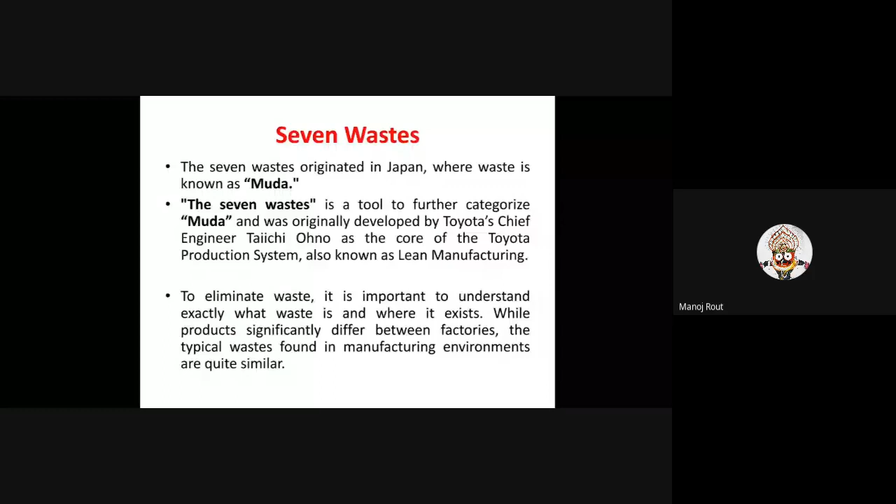As you know, today's topic is known as the 7 wastes. The 7 wastes originated during World War II in Japan, where a high level of specialization was involved. Waste is known as Muda in Japanese. The 7 wastes is a particular tool for categorizing Muda, originally developed by Toyota's chief engineer Taiichi Ohno, who was the core developer of the Toyota Production System. Ohno developed the concept of the 7 wastes, which is also known as lean manufacturing.

To eliminate waste, it is important to understand exactly what the waste is and where it exists. While products differ significantly between factories, the typical waste found in manufacturing environments is quite similar across any kind of manufacturing industry. Let's go to the next slide.

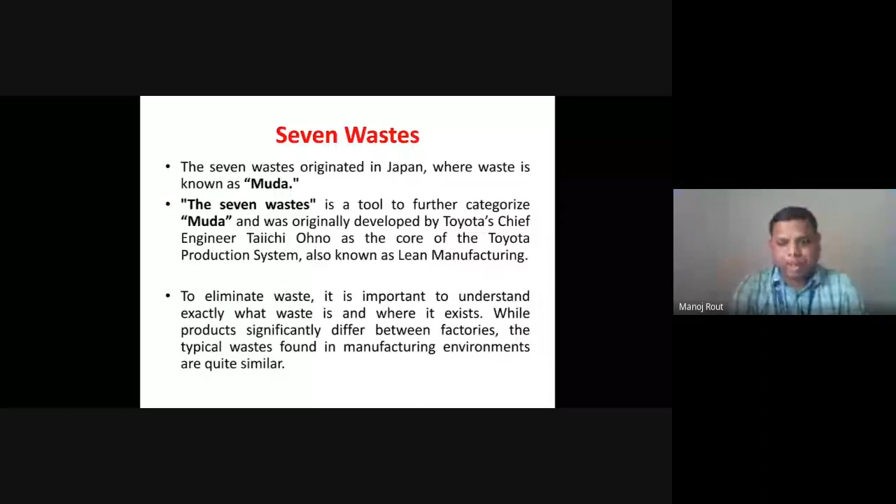The first one is overproduction: produce faster in higher quantity than the customer demand. Overproduction directly involves more value addition in case of storing and loading activities, and other related activities concerned with overproduction.

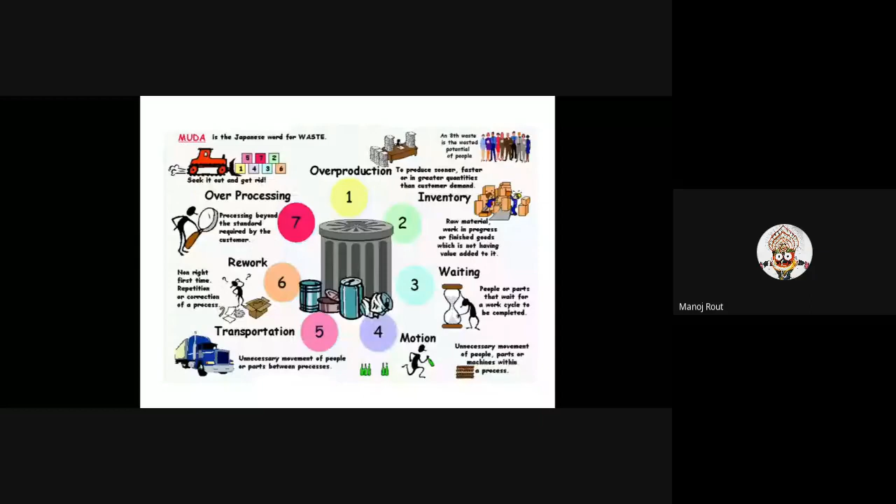The next one is inventory: the raw, work in progress, and finished goods which do not have value added by maintaining a higher amount of stock. That also needs some space, warehouse, storing and loading activities. The 7 waste methodology, introduced by Taiichi Ohno, suggests you have to maintain an adequate level of inventory.

The next is waiting: the people and parts that wait for a work cycle to be completed. We have to minimize the waiting cycle of parts and people directly involved across the number of workstations.

The next one is motion: unnecessary movement of people, parts, and machines within the process. Whenever a person is assigned to different process activities and moves from one place to another, that hampers production activities. When a person is not strictly involved in manufacturing activities, due to lack of involvement at workstations, they generate more wastage in terms of delay, machine setup, running the machine, and maintenance.

The next part is transportation: unnecessary movement of people or parts between processes. Whenever you do not employ automated guided vehicles or articulated robots for movement of people or material from one workstation to another, they directly generate wastage, and in some industries this generates a higher amount of wastage during transportation activities.

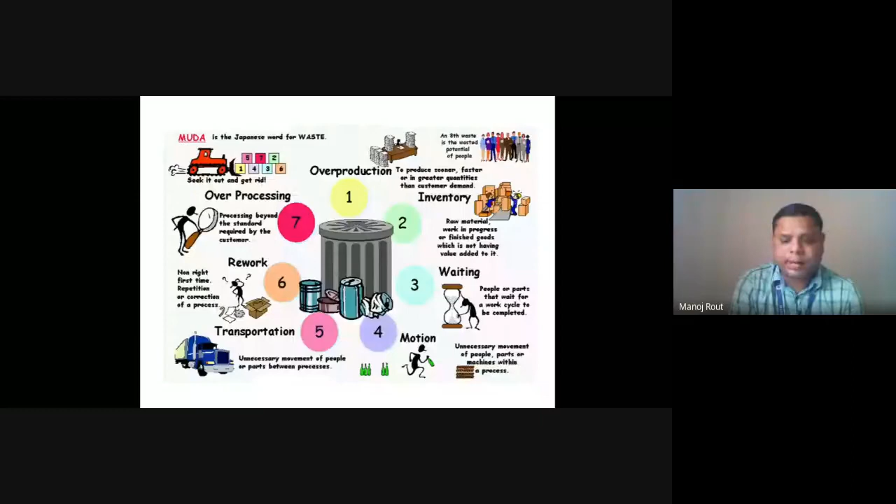So these are the things we discussed one by one in the previous slide. Let's go to the next slide. Okay, we have already discussed the first one is overproduction, waiting, then transportation, inappropriate processing, unnecessary inventory, unnecessary or excess motion, and the last one is defect. Going to the next slide.

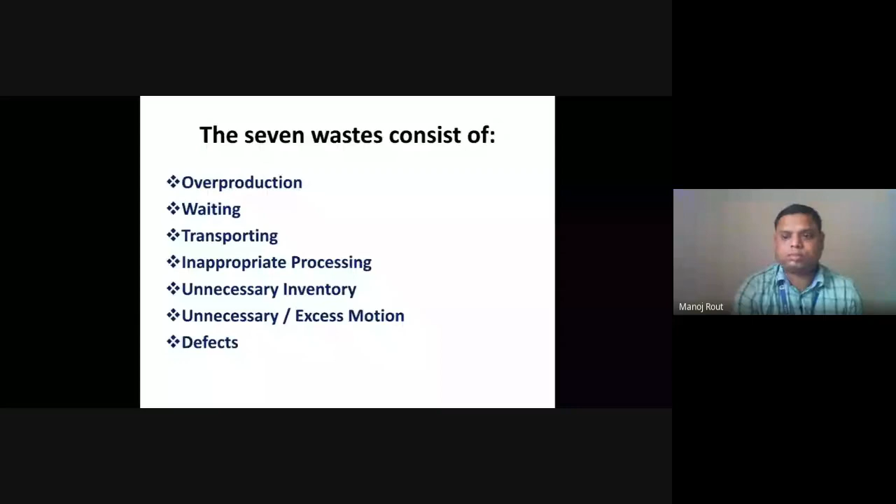In case of production, overproduction is very costly to a manufacturing plant because it prohibits smooth flow and actually degrades quality and productivity. The Toyota production system also refers to the just-in-time concept: every item is made just as it is needed. Overproduction refers to just-in-case, which creates excessive lead times, results in high storage cost, and makes it difficult to detect defects.

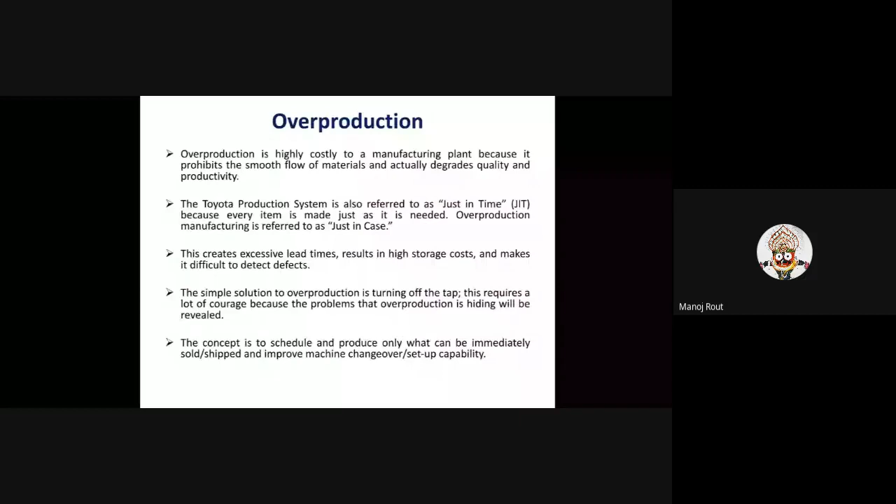The next point is that the simple solution to overproduction is turning off the tap. This requires a lot of courage because the problems that overproduction is hiding will be revealed. This concept is to schedule and produce only what you can immediately sell, to improve machine changeover/setup capability. Due to overproduction, you get high storage cost and more defects in product quality. So you have to go for a remedy like scheduling and producing only what is immediately needed and sold, and go for machine changeover if any difficulty occurs at the workflow level.

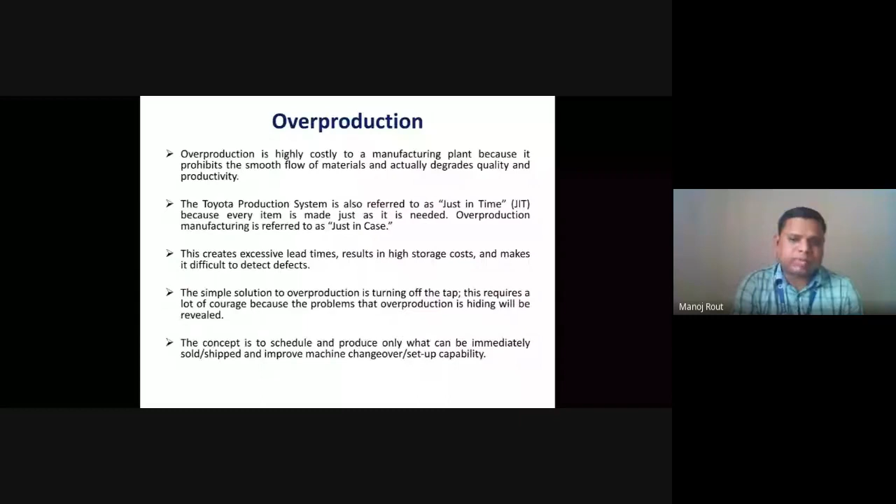You have to go for setting the capability of machines. Next one is waiting. As far as concerned with the time, whenever goods are moved or processed, the waste of waiting occurs. Typically, more than 99% of a product's life in a traditional batch will be spent waiting for the process. That is why if you go to the company, they made the arrangement of more number of buffers to reduce the time of waiting.

The next point is much of product lead time is tied up in waiting for the next operation. This is usually because the material flow is poor, production runs are too long, and distances between work centers are too great. So with proper arrangement of a layout, you have to place the workstations nearer to the next workstations in the sequence.

So due to that, you can minimize the material flow from one workstation to other workstations, minimize the distance, and also affect the lead time. So if you minimize the lead times, the workflow, and the distance between work centers, it directly affects your waiting.

The next is, as you know, the theory of constraints, a concept given by Eliyahu Goldratt. He stated that an hour lost at a bottleneck process is an hour lost to the entire factory output. So if you have arranged 4 to 5 workstations in a sequence, and machine number 2 faces any kind of difficulty, for example it is lost for 1 hour, that breakdown will affect the entire factory output.

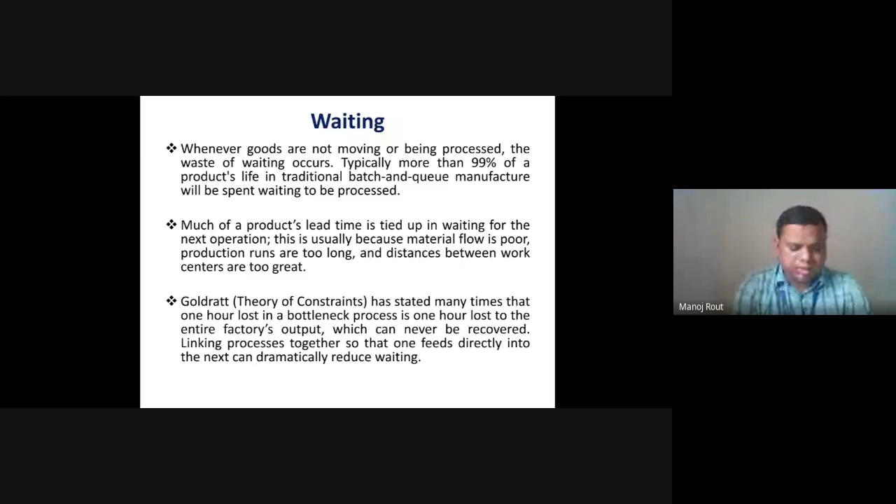Okay. He suggests that linking the workstations, or linking processes together so they can feed directly into the next, dramatically reduces the waiting time. So if you arrange 4 to 5 workstations and workstation number 5 gets any kind of maintenance difficulty, the whole team attends that difficulty in the form of maintenance and smooths the machining and the material flow, so that the product passes from one workstation to other workstation.

In that area, that is the concept they have given, the theory of constraints, and all the teams attach to it and make an effort to smooth that particular operation. Moving to the next slide.

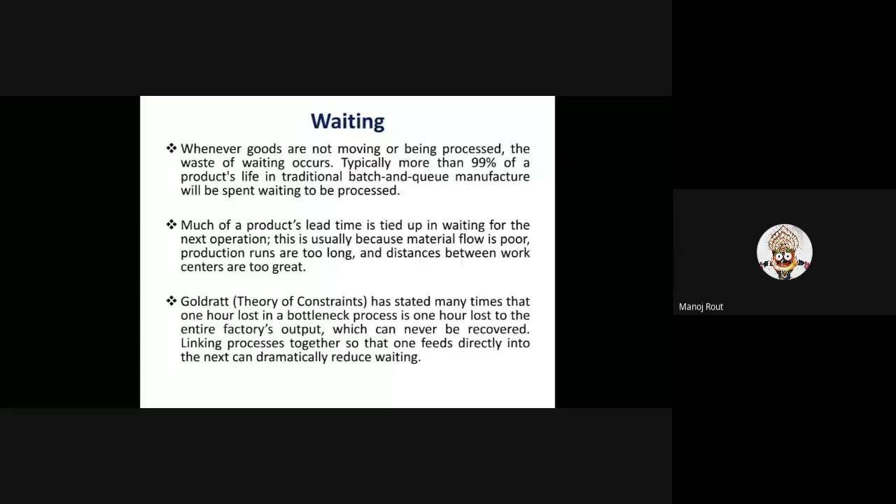The next is transport. Transporting product between processes is a cost that adds no value, with movement over long distances due to improper arrangement of the layout of machines. The material handling used to transport material results in another organizational cost that adds no value. So whenever you arrange an improper layout of machines, equipment, and tools, the movement is very much higher. No value should be added in case of transportation.

But transportation can be difficult to reduce due to the cost of moving processes close together. That is why for transportation they suggest you arrange the machines attached together in such a way that you can minimize the cost of transportation, or cost of moving components from one workstation to other workstation.

Further, it is often hard to determine which processes should be next to each other. Mapping product flow can make this easier to visualize. That is why it is advised for operational activities that they should implement the product flow map. By the help of a product flow map, they can easily visualize and track the activities of workstations, or even people directly involved in manufacturing activities. Moving to the next slide.

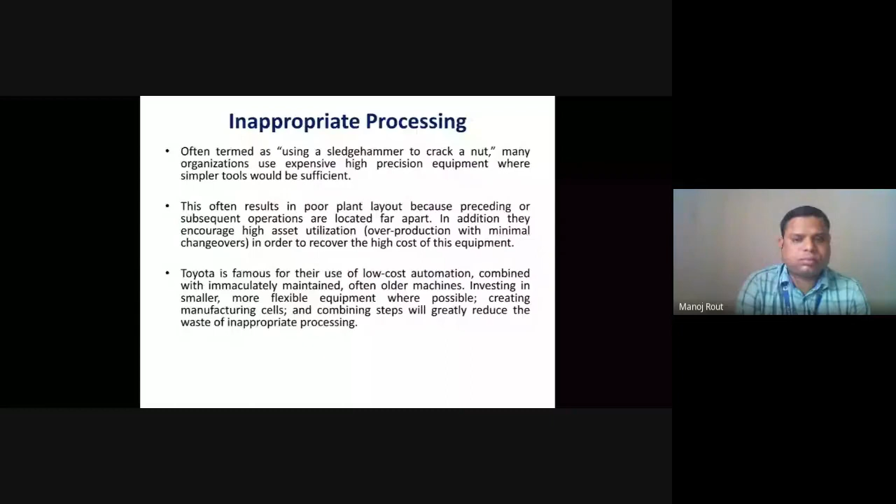The next is unnecessary inventory. Work in progress is a direct result of overproduction and waiting. The excess inventory tends to hide problems on the plant floor, which must be identified and resolved in order to improve operating performance. Excess inventory increases lead time, consumes productive floor space, delays identification of problems and inhibits communication. By achieving seamless flow between workstations, many manufacturers have been able to improve customer service, slash inventory, or optimize inventory levels and their associated cost.

So if you hold a huge amount of inventory, it directly goes to work in progress, and it directly hampers operating performance. It also affects different aspects of good manufacturing practice. For example, lead time, it also occupies floor space, delays identification of problems, and improper communication leads to unnecessary inventory levels.

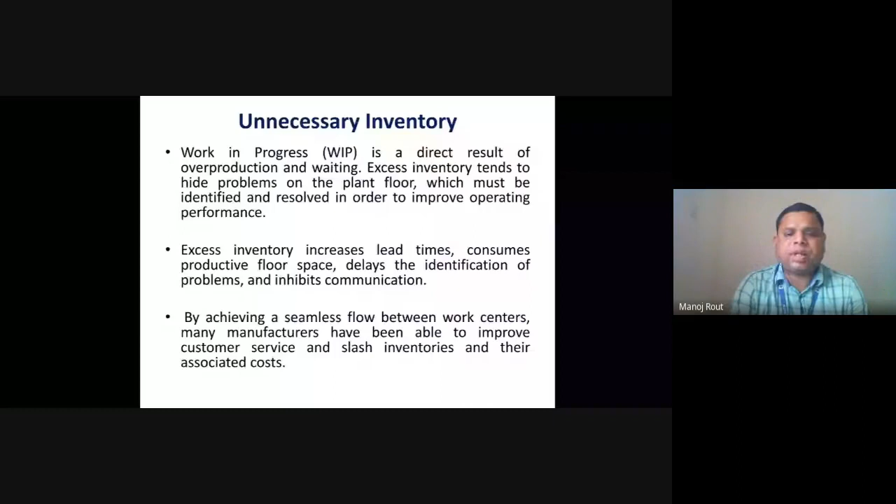So it is the advice through the 7 wastes implementation. By achieving seamless flow of work centers, many manufacturers are able to improve customer service, because from the company point of view, they optimize the inventory level and the costs directly associated with the inventory level.

The next one is unnecessary or excess motion. This waste is related to ergonomics, that is the study of people's efficiency in their working environment. It is stretching, walking, lifting, and these things. That is why motion study should be thoroughly implemented to track and visualize control of those people who are directly involved in a number of workstations.

There are also health and safety concerns, which in today's litigious society are becoming more of a problem for the organization. So jobs with excessive motion should be analyzed and redesigned for improvement with the involvement of plant personnel. And it is the duty of the HR department. They provide adequate training regarding OHSAS 18001, which is directly related to health and safety, an international standard implemented for the occupational health and safety of people directly involved in the organization.

That is why another method is known as therbligs. As you know, in therbligs there are 18 symbols used, and those symbols can be easily analyzed and tracked through camera surveillance or CCTV surveillance, and if any kind of difficulty occurs, it should be easily resolved, and an improvement should be implemented to resolve those kinds of problems in motion or excess motion study.

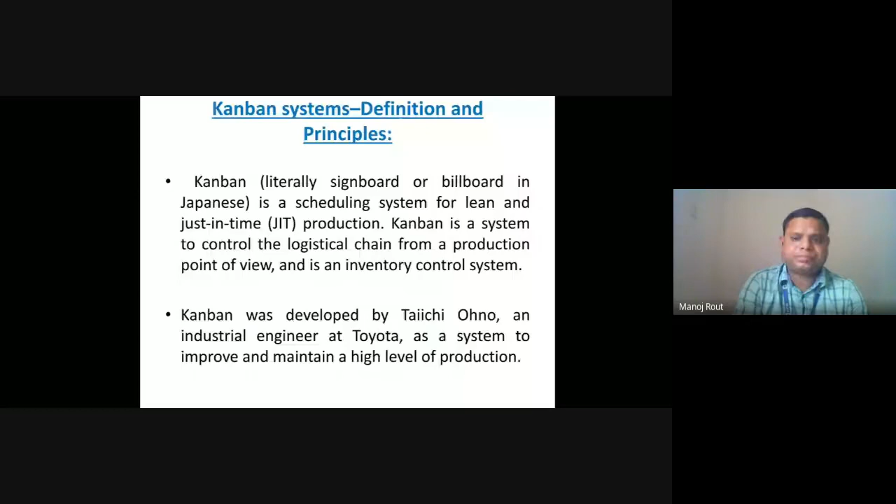The next one is Kanban system. The Kanban method is an approach to incremental and evolutionary process and system change for organizations. It uses work in progress limits and a pull system as the core mechanism to expose system operation or process problems and stimulate collaboration for continuous improvement of the system. That is why, through those signals and the display Kanban systems, you can use the pull system as a core mechanism to expose system operation problems, especially in the process. And it is a collaboration for continuous improvement of the particular system.

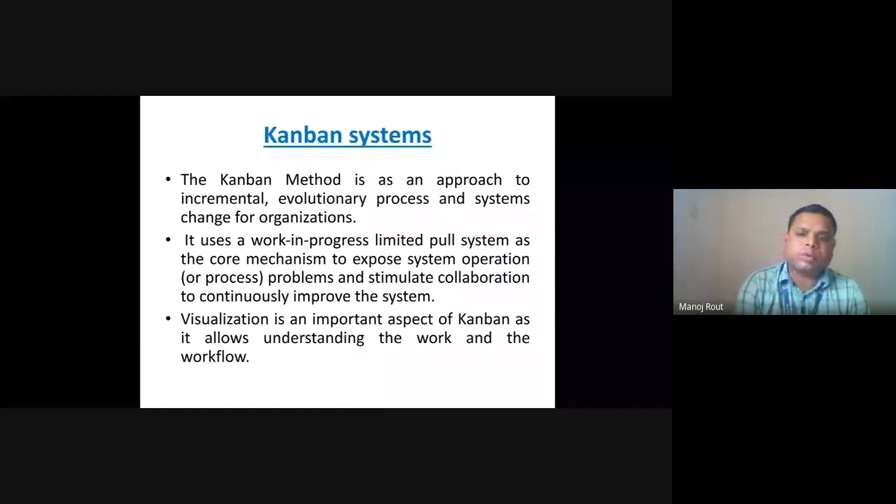So visualization is basically an important aspect of Kanban. It allows you to understand the work and the workflow of material from one workstation to another, especially on your shop floor. Moving to the next slide.

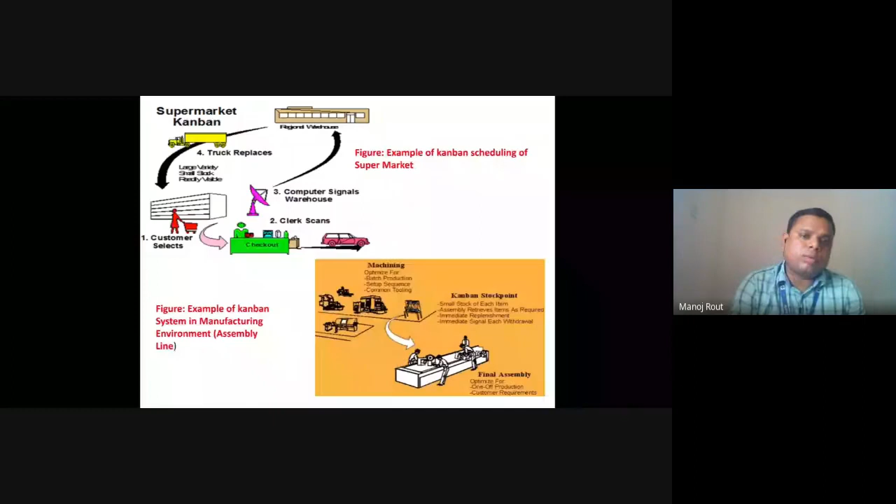The next one is the types of Kanban systems. So in a Kanban system, the workstations communicate with each other through their cards, where each container has a Kanban associated with it. The two most important Kanbans are production type Kanban and transportation type Kanban. So in the previous image you have seen, in the case of manufacturing Kanban, there are three workstations, and they communicate with each other, starting from the machining, then the Kanban stock point, and the final assembly. They produce what the customer needs in a just-in-time manner. So that is why Kanban is implemented with the help of lean manufacturing as well as just-in-time production. Moving to the next one. Next one.

So going to the first one, the production Kanban. As you know, the production Kanban, when received, authorizes the workstation to produce a fixed amount of product. This is known as production Kanban. And the production Kanban is carried on the container that is associated with it. That means it contains the details of that particular product in a fixed amount, and that container is associated with that particular product.

That is the concept. I'll just repeat: the production Kanban, when received, authorizes the workstation to produce the fixed amount of product, and the production Kanban is carried on the container associated with it. That means it displays all the specifications, the data, the tools, the equipment related to producing that fixed amount of product. Moving to the next one.

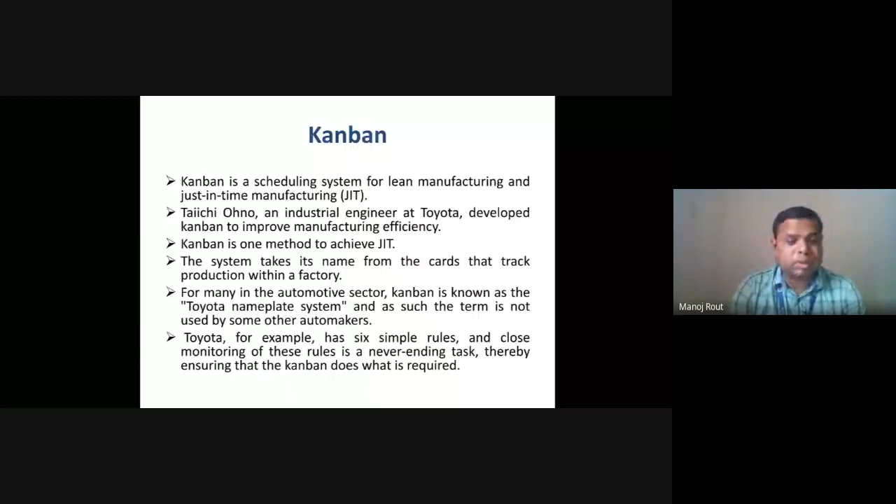Taiichi Ohno implemented the Kanban system for Toyota production systems and emphasized 6 simple rules. So what are the rules? Moving to the next slide, Toyota has formulated 6 rules for the application of Kanban.

The first rule: each process issues a request to its supplier as it consumes from its supplier. The next: each process produces according to the quantity and sequence of incoming requests. The third: no items are made or transported without a request. The fourth: the request associated with an item is always attached to it.

The fifth rule: the process must send no defective items, to ensure the finished product will be defect free. The sixth: limiting the number of pending requests makes the process more sensitive and reveals inefficiency. These are the 6 rules implemented by Toyota for achieving just-in-time manufacturing in Toyota production systems.

Moving to the next one: the Kanban card. The Kanban card is a key component of the Kanban system, and it signals the need to move material within the production facility or to move material from an outside supplier into the production facility.